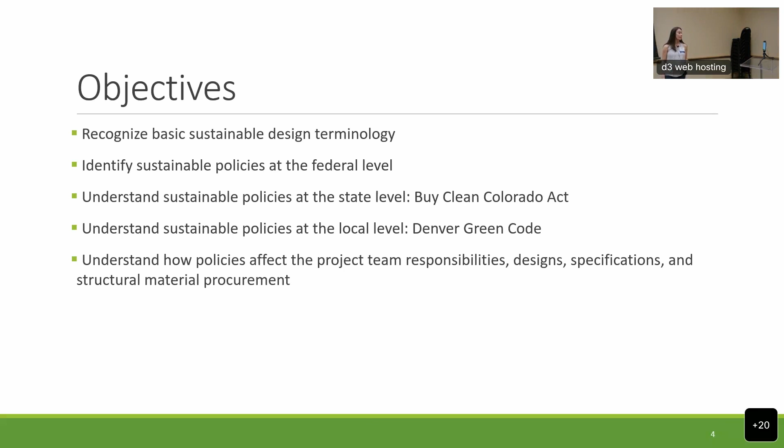Okay, we're up and running. All right, so the objectives for today's presentation: first, for all of us to recognize some basic sustainable design terminology to get us all on the same page. Next, Kim will be reviewing the federal legislation of what's happening, kind of big picture, in the United States. Then we're going to focus a little bit more at the state level, Buy Clean Colorado, and then focus in a little bit more on what's happening at the local level, so in Colorado specifically, the Denver Green Code. We want to understand how these policies really affect us as structural engineers within our designs and our construction documents. And then really understand how we can help as a design team to be proactive team members so that we're really pushing forward everything that we can do from the engineering side of things. Last, we want to understand the structural material procurement.

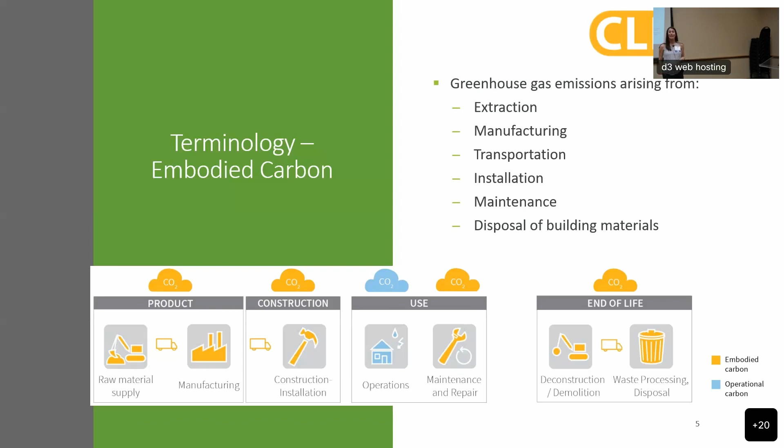So first, to start off, we are going to review some basic terminology. We'll start with the term embodied carbon, and you'll hear today a lot about embodied carbon. Traditionally, we've seen a lot of talk around operational carbon, right? And now the industry, specifically the structural industry, is really being pushed to focus on embodied carbon. So what is this? Well, embodied carbon is the greenhouse gas emissions, and it's really associated from all the way from the very beginning where we're extracting the materials, you can see in the chart here on the left, all the way to the end of life.

And you can see the blue represents the building operations, and that is excluded from the embodied carbon that we're talking about. Next is an environmental product declaration. By a show of hands, who knows what an environmental product declaration is? Okay, so we're doing pretty good, we've got about 50% or so. The environmental product declaration, or an EPD, is essentially a nutrition label for our structural materials that are going into our buildings. And what we're looking for here when we're looking at an environmental product declaration is the global warming potential, or your GWP value.

That global warming potential is in kilograms of carbon dioxide equivalent units. You'll see that that's what 'equivalent' means - essentially taking your carbon dioxide, looking at the global warming causes from carbon dioxide, and taking the other greenhouse gases and trying to create an equivalent carbon dioxide in terms of global warming, so that we're able to compare apples to apples in terms of the different greenhouse gases and how we're measuring their impact on global warming.

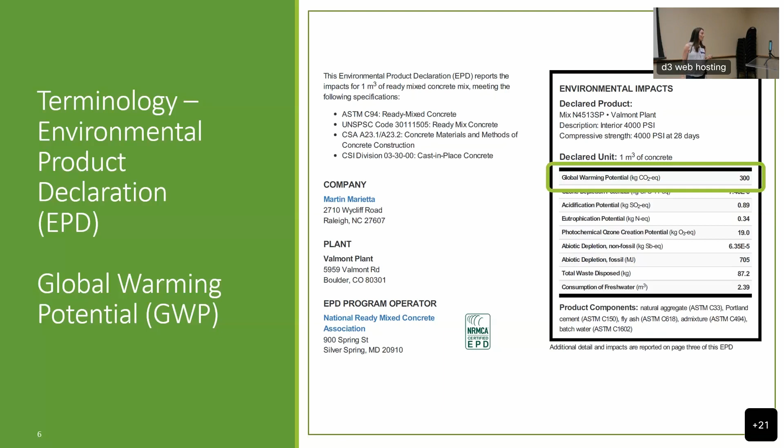For environmental product declarations, there are a few different main types you'll hear about. Industry average EPDs cover multiple products over multiple manufacturers in multiple locations, and manufacturers are able to use those environmental product declarations.

There's a product-specific EPD, which is one product from one manufacturer, but potentially from multiple locations. And then there's a facility-specific EPD, which represents one product from one manufacturer at a single manufacturer's location.

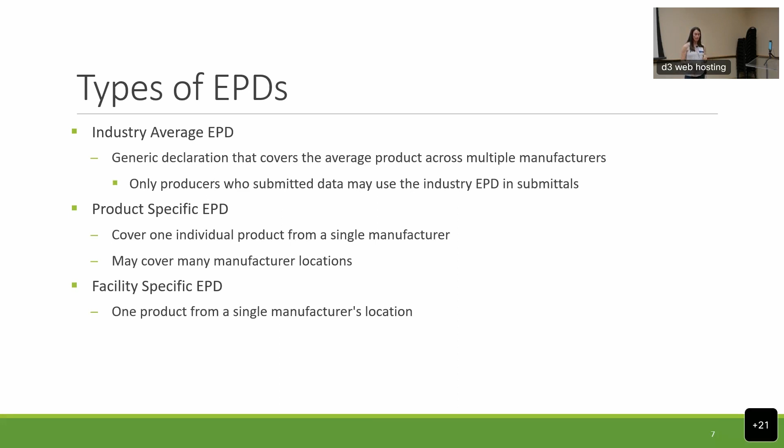So when we're looking at the term embodied carbon, as structural engineers we're just kind of used to the traditional materials and ways of our practice. One of the new easy equations we can look at is how you calculate embodied carbon.

You're simply taking your material quantity or volumes - you can get that quick hand calc, your spreadsheets, or from a Revit model, for example. You multiply it by the global warming potential number from the environmental product declaration. From that, you get your estimated embodied carbon.

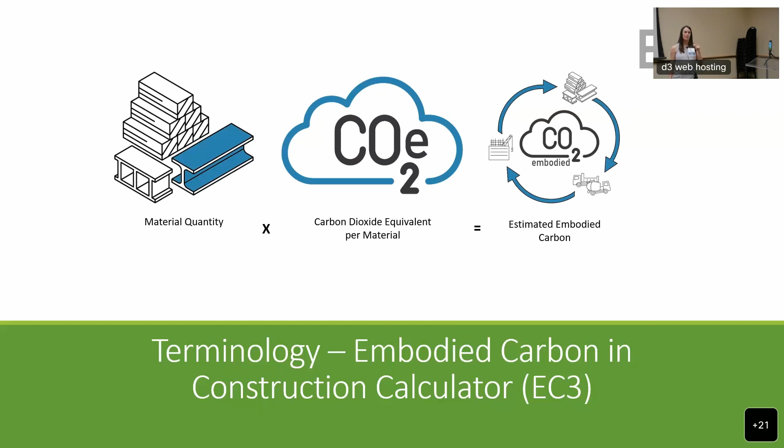Now, those environmental product declarations - one place they can be found, the most common, is EC3. EC3 stands for Embodied Carbon in Construction Calculator. This is an online database where you can go find EPDs from all around the country, and you can filter based on your specific interests in terms of concrete strength, fly ash percentages, and different things like that.

EC3 is often used in combination with your life cycle assessments. Don't worry, we're almost done with the terminology part here. So LCA is looking at the environmental impact of your building from the start to the end of life, and even as far as recycling the materials at the end.

There are a few different LCA softwares out there approved within our industry. Athena and Tally are both used in combination with the EC3 database that hosts the EPDs. And then the other one is one-click LCA that consultants are often using - that specific software has its own internal EPD database.

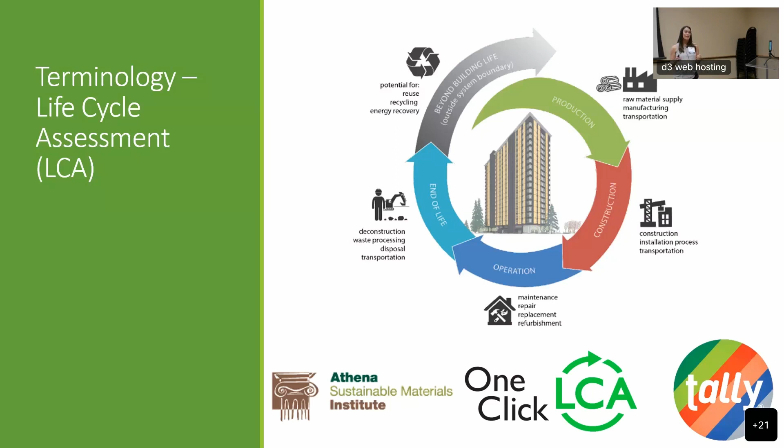So when you're looking at these life cycle assessments, there are different stages you can take into account. Oftentimes, from the structural engineering side of things, we'll look at the A1 to A3 stage, which is the extraction of your material, the transportation of that material from the site to the manufacturing facility, and then the manufacturing of that material itself. The reason we look at that stage early on is because it has the largest impact from an embodied carbon standpoint in terms of material production.

So why do we care about embodied carbon? From a global perspective, our building and construction industry is responsible for almost 40% of global carbon emissions, which is a huge number. So unless we do something as an industry, we can't help achieve the global goal of a 1.5 to 2 degrees Celsius maximum temperature increase that we've been given.

Or you can look at it as, hey, this is a great opportunity for us as an industry, because it accounts for a large portion of global warming, and any change we can make can help drive that in the right direction and in a positive way.

It's also important to point out that whatever political beliefs you have, as an industry we're here to serve our clients and their needs. More than ever, we're getting requests to help understand how to measure the environmental impacts of our buildings, making sure we can help clients understand what they can do. So from a consultant standpoint, it's really important for us to at least have a basic understanding of how we can help our clients make these changes.

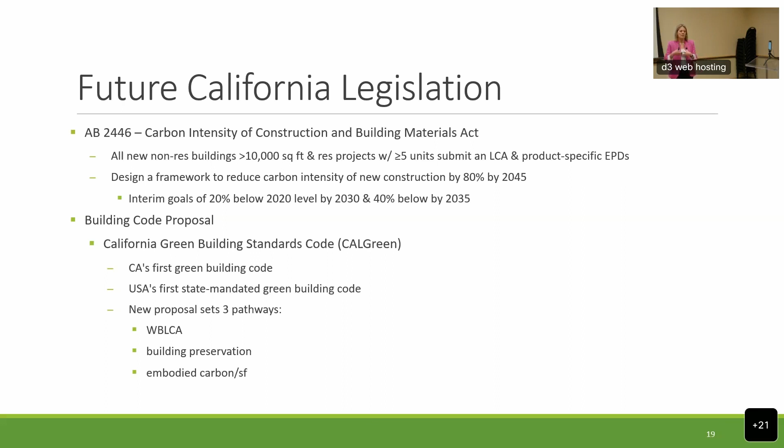You can do a whole building life cycle analysis, you can investigate building preservation—reuse and resilience of our buildings—or they can set a target where you have an embodied carbon per square foot allowance, and as a design team you choose how to go about satisfying that. So it gives you a little more opportunity and leeway in how you want to meet these provisions. Again, just something that may be coming our way.

So what's happening here in Colorado? This was signed into law in July of 2021 by Governor Polis. The state has a goal to reduce its embodied carbon emissions by 50% by 2030 and 90% by 2050. That's not just attributed to the building sector, that's the overall state. I'm sure you've seen some of the headlines with our Xcel power plants and things like that in the state, so that's rolled into those figures.

This policy includes statutes for the Office of the State Architect as well as CDOT, so it applies to both types of projects. CDOT is about a year behind the state architect in that they took a year to collect EPDs to figure out what their carbon intensities were for the materials being used in their projects before they assign limits and restrictions.

Again, this is going to apply to publicly funded projects in the state of Colorado. So any tax dollars associated with a project you're working on will fall underneath this Buy Clean Colorado Act, as long as the cost exceeds $500,000, and that includes design and construction. It's for any project where a solicitation is granted after January 1st of next year - so when an RFP is issued on or after January 1st, it will have to abide by Buy Clean Colorado. Anything you're working on right now is safe.

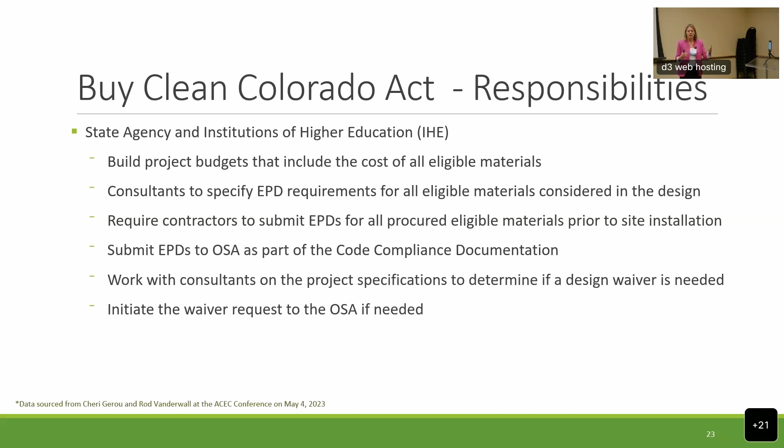For those of you doing projects on CU's campus or CSU, some of those public institutions may already have some of these things in their specifications, so it's worth double checking to make sure they've got it. Some of these institutions and organizations have already been implementing this practice before the policy went into effect.

As far as consultants, what do we need to do? We need to be aware of it, prioritize products, and try to shift our focus towards products that are going to meet these limits. We need to specify what we need in our specifications. It's pertinent for us, even though contractors and everyone should understand this is under buy clean, it's worth the effort to put it in your specifications to make sure the people actually procuring the materials know about that, because there can sometimes be a disconnect there.

And then we will be required to verify that the GWP for the materials that the contractor is planning to use for the project do meet the GWP requirements of the policy.

So we think it's going to look something like a shop drawing type submittal, where let's say the steel fabricator has to submit to me who they're getting their steel from and their EPD, so that I can verify that it meets the GWP limit.

Correct. Like a mix design would come with an EPD and we verify that it's below the GWP limit. Yeah, it may or may not need to be stamped.

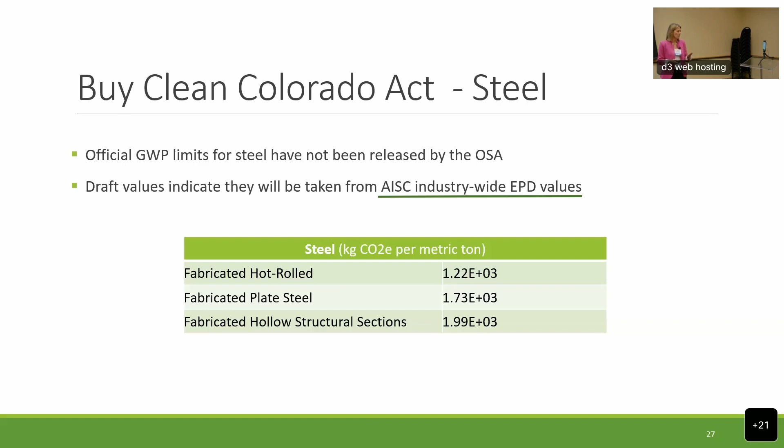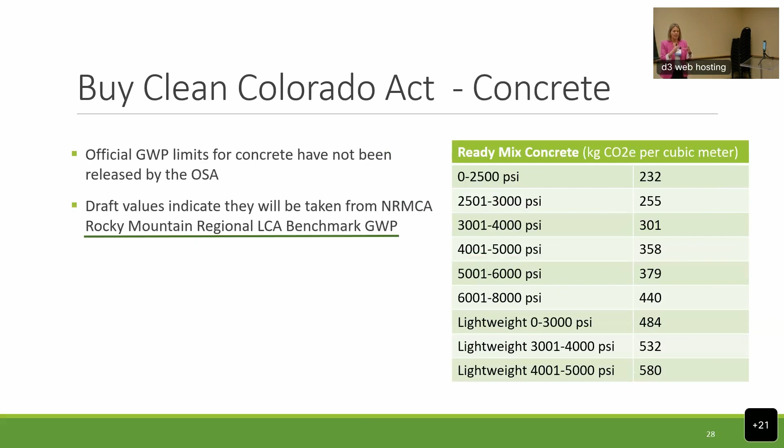For steel, the limit is the industry-wide EPD, so anything below industry average would be acceptable. For concrete, it's a bit more regional - they've taken data from EC3 and done an analysis of the EPDs for the Rocky Mountain region, then taken an average of that, so it's more specific to our area, to the state of Colorado. And lastly, for wood, the limits being set are the industry-wide EPDs as well.

As far as materials are concerned, what's written into the policy - Colorado is at the forefront of this because we're very broad in our definition. California is very focused on steel, reinforcing, flat glass, and mineral wool insulation - just those four materials are included in Buy Clean California. Colorado has really done what we perceive as the better thing and included all the building materials: steel, concrete, wood, asphalt, glass, PT, and reinforcing are all included in Buy Clean Colorado.

So all of those materials will have GWP limits set for them. We don't have the draft values for these other materials listed here, so that's TBD - those will come out at the end of June.

And then lastly, compliance. What happens, how are they ensuring that we're abiding by this policy? There's a closeout form that needs to be submitted by the contractor in order for them to get their CO, and that's where they'll have to provide all of their EPDs for these materials. So if they don't provide the EPDs, they don't get their certificate of occupancy.

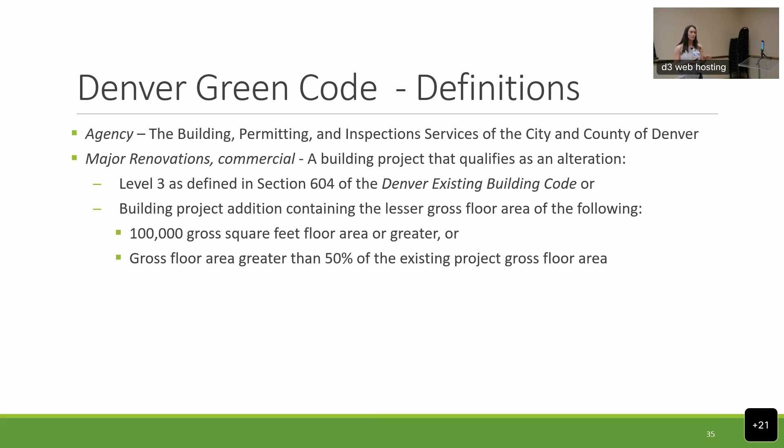So when we're looking at definitions, the controlling agency here is the Building, Permitting, and Inspection Services of the City and County of Denver. When we're talking about major commercial renovations, what does that mean? Well, it's a building project that contains the lesser floor area of the following: either 100,000 square feet, or gross floor area greater than 50% of your existing building that you're adding on to. So that's what qualifies you — if you fall into one of those categories, then you have to comply with this 2022 Denver Green Code.

So like I mentioned, we are a couple weeks into this code already. There are transition rules that do apply, and it would apply to a small percentage of buildings here. But if your project happens to fall under a major project, defined as a project valued at $10 million or more, and you can have your foundation package permitted by July 1st, then you have the option to petition the building official to follow the 2019 optional Denver Green Code. That would also require you to have all remaining phases in by September 1st of this year. However, if you don't fall into that category, you are required to comply with these new mandatory Denver Green Code requirements.

So when we look at the Denver Green Code, there's 10 different chapters listed here. From the structural engineering perspective, we're really focused on chapter 9, the materials and resources chapter. In the new construction column within that chapter, you have to meet 3 different provisions, and for major commercial renovations, you have to meet 1 provision. It was noted that there are 116 different provisions you can try to meet, so requiring 3 or 1 for now is not a big ask.

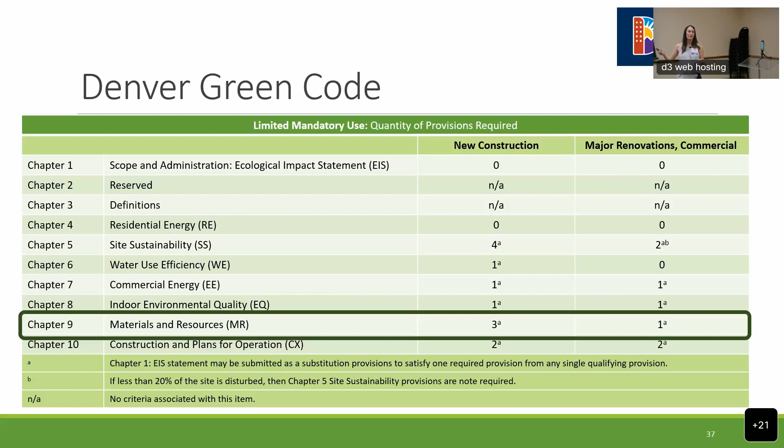So within chapter 9, there are 5 different provisions that can help your design team achieve one of those 3 points for a new project. There's the embodied carbon dioxide limits for concrete and for steel, those are the first two, MR02 and MR03. Then there's the environmental impact of your building materials, design for deconstruction, and the use of salvaged materials.

When looking at this chapter, we're not going to dive into each specific provision with each equation it requires. But as an example, for MR02 and MR03, we'll dive into those values and how they compare to the Buy Clean Act. There are embodied carbon limits provided in the Denver Green Code, and it would be up to us to provide those in our specifications and construction documents.

For the environmental impact of building materials, some of these provisions let you pick 2 or 3 out of the 5 listed, and you choose with your design team which makes the most sense for your project. For example, you could prove up to 10% recycled content for a certain percentage of your volume, or a certain percentage of your cost, I believe is what it's based on. Depending on what you decide as a design team, you can choose the different provisions and how it makes most sense for your project.

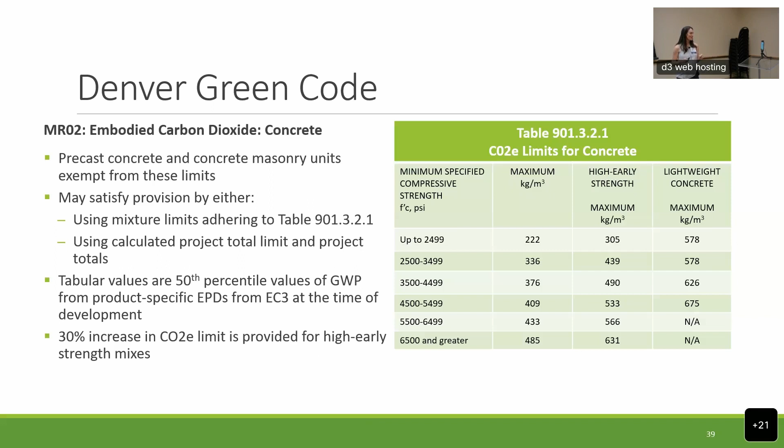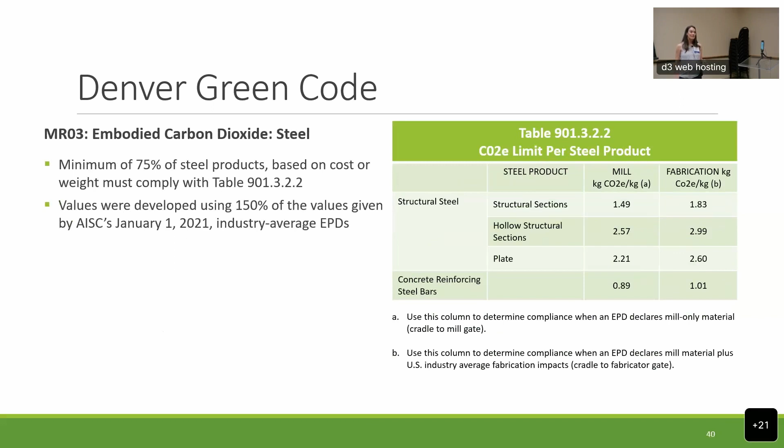When we look at a quick project example, again, there are a number of different ways that you can get to those three provisions you have to meet. So what this would look like is you sit down with your project team, go to chapter 9, and ask how you're going to get your three points for the new project.

Then you can go through and decide, okay, we have these different structural options and other options such as mercury content level of lamps, which maybe the architect knows is an easy point for them. So they take that point. We know we have a lot of concrete in our project and some building materials that help comply with requirements for meeting environmental impacts. For example, you could choose MR02, MR06, MR07. Those would all get you a point.

If you go to MR07, they have different options. You can choose some prescriptive requirements or some performance requirements. So maybe you choose to go with the prescriptive requirements. I believe once you get to that section, you can choose 2 of the 4 or 5 options.

And then you can say, okay, well, we know that our concrete is being regionally sourced. That's one of the benefits of concrete in Colorado. I think they have regional as within about 600 miles, so that's an easy point that you can get. And then maybe you have a lot of timber in your project, so you know the bio-based point is an easy one to document. That's kind of how you would go through that procedure.

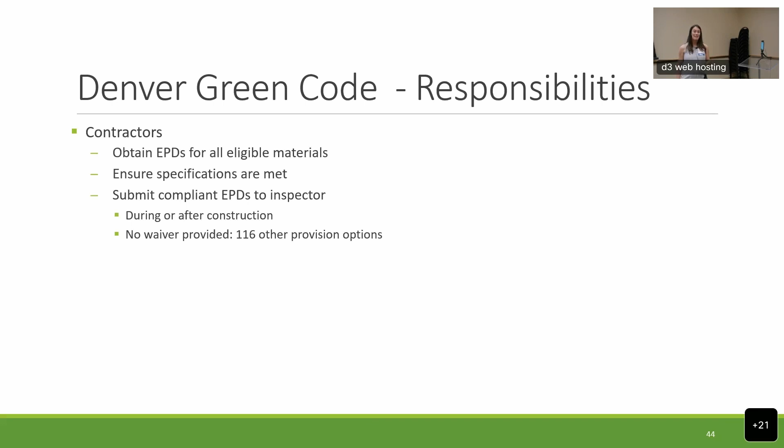Again, they're not providing a waiver for the Denver Green Code, so a little bit different than the Buy Clean Act - there's no waiver out there. They expect you to meet these provisions.

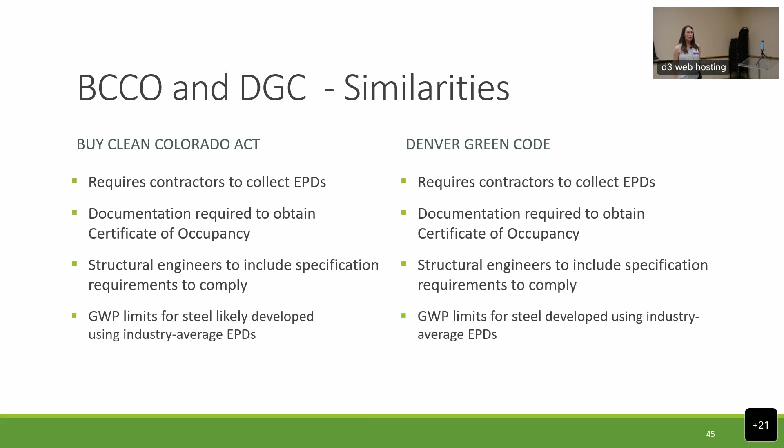So very quickly, we'll wrap up looking at some similarities and differences between the two. For similarities, they both require the contractor to collect EPDs, and they both require documentation in order to obtain the certificate of occupancy. As structural engineers, we're required to include the necessary information in our specifications and construction documents to comply. Another similarity is that the GWP limits are likely being developed from the industry average EPDs from AISC - we say likely because Denver Green Code and the Buy Clean Act are still coming out with those values.

In terms of differences, Buy Clean Colorado is regulated by the Office of the State Architect. Denver Green Code is regulated by the City and County of Denver.

Buy Clean is submitted through your L1 form at the end of the process to get your CO. The Denver Green Code process is through your permitting and through your inspections. Buy Clean is effective January 1st of next year, 2024. Denver Green Code has just gone into effect as of May 1st.

Buy Clean is updated every 4 years, Denver Green Code every 3 years. The GWP limits and eligible materials under Buy Clean include the additional materials Kim mentioned. Under Denver Green Code, it's concrete and steel. The GWP limits for concrete are a little bit different, so those values will likely not align potentially ever, depending on when they update them.

So keep that in mind. You just have to be aware and keep an eye out for how those values are changing, and we'll try to keep you updated on that. GWP limits for steel are both based off of industry averages, but for Buy Clean it's likely the average, whereas Denver Green Code it's 150% of the average. So still a little bit of a difference there.

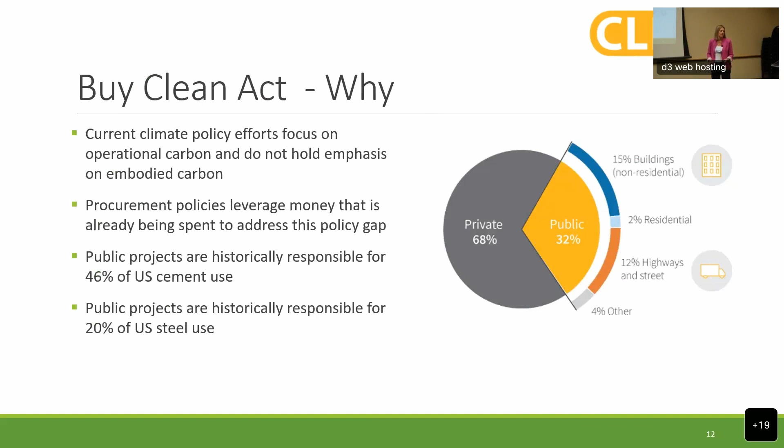Just to clarify, does Buy Clean Colorado ever apply to private projects? No, not right now.

Correct. So Buy Clean Colorado only applies to publicly funded projects - tax dollars.

This may sound kind of weird, but with goals of reducing 80 to 90% over the next 40 years, how is that realistic? I am already designing at optimal amounts of material. There's no way to reduce my building materials by 80%.

I agree. That's why it caught my attention, is because they're putting that number out there. I agree, it's not achievable.

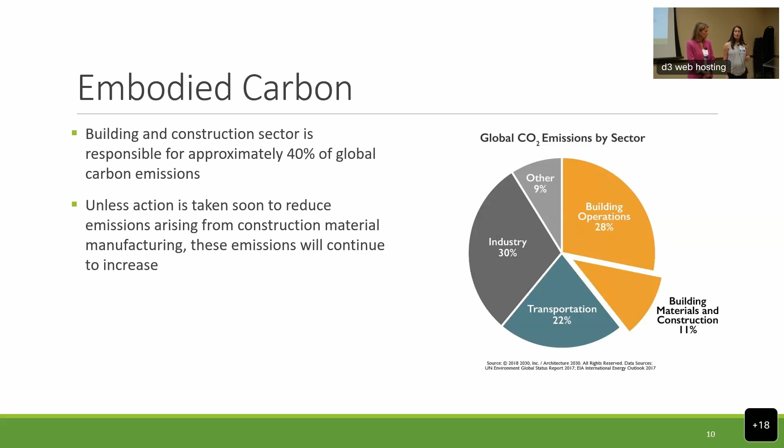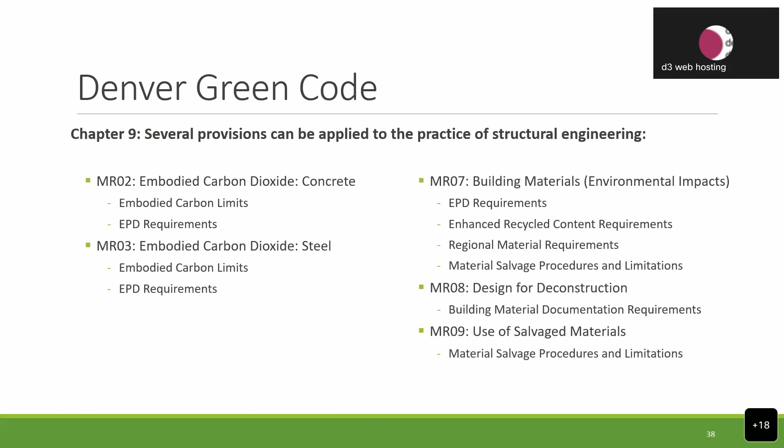The Denver Green Code essentially leaves it up to us as consultants to make sure that when we're specifying the different materials, it's up to us to be aware of the GWP limits and what can be provided, but we're not collecting EPDs at that time. It's more of a design team responsibility to make sure we can meet those standards. On the contractor side, that's when they actually have to obtain those EPDs, so that happens during construction. What consultants are required to provide is a snippet or snapshot of your spec at the time of permit. You have to provide that for Denver Green Code, but not the actual EPDs.

You have your checklist that you fill out, and their point was just to make it clear, show it in your specs or construction documents what those requirements are. So that was the one requirement, trying to make it clear so they can go to it quickly and check it off.

We have another online question. How are technologies like injecting CO2 in concrete treated by these acts? Do they offset the embodied carbon or get factored into final reporting? It's going to depend on what the technology is, and that gets really into the weeds with the PCR and the EPDs. The PCR is the rules by which the EPD can be created. It also governs what technologies you can take into account when creating the EPD.

So for concrete, if it's some kind of alternative cement or something like that, that can easily be incorporated into an EPD, so it can be documented and applied to the legislation and policies. There are other technologies that are currently not specifically allowed by the PCR, therefore they cannot be incorporated into an EPD, and therefore cannot be used to reduce the carbon intensity for these policies. Does that make sense? Depends, best answer.